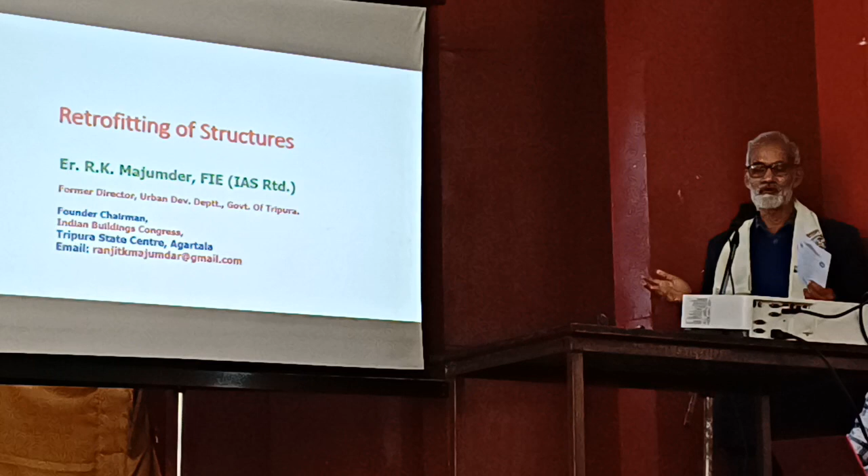In the inaugural session, you have already heard about the intention of this training program. The topic is retrofitting of structures. It is a very wide range. Actually, it needs at least a 3-day program for this discussion and training. However, since this is a beginning as a joint program between Tripura and Manipur, associating Indian Buildings Congress, a professional body, and also the largest professional body, Institution of Engineers India, Manipur State Center, I believe that in future we will be able to conduct such type of program not only in this state but in other states of the Northeast also.

So next, my contents of presentation: concept of repair, restoration and retrofitting of structures, retrofitting of buildings, retrofitting of bridges, some knowledge sharing on specific retrofitting of a heritage building we have already done in our state of Tripura, and also the concluding remarks. This is a very large presentation. I will try to skip.

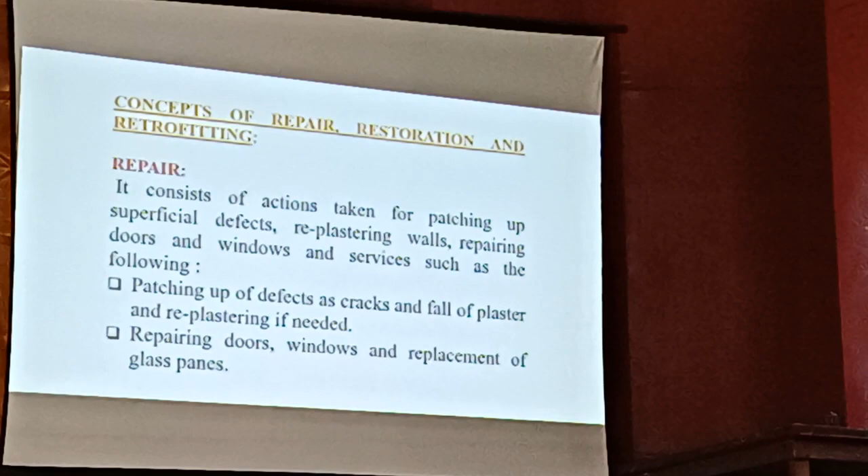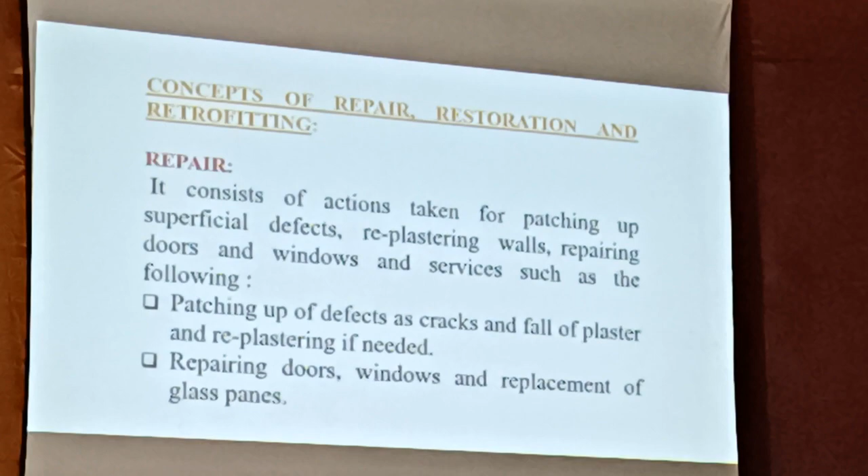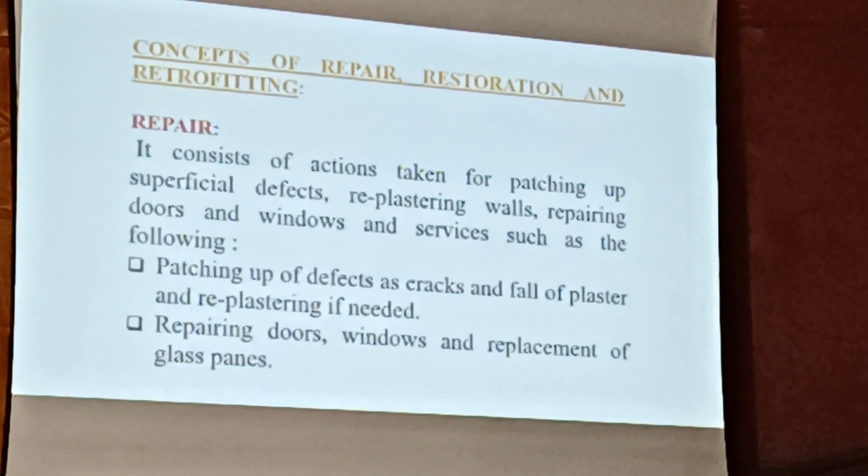Repairs you know. Sometimes we become ill, we go to the doctor, and as per the necessity, influenza or whatever, we do the thing. In our case also for the structure, as and when required, some repairing, some plastering, some electrical side or mechanical side we do in this repair. So we are not interested in this one. Next. So it will be seen that repairing work carried out as above does not strengthen the structure. It is only the first thing.

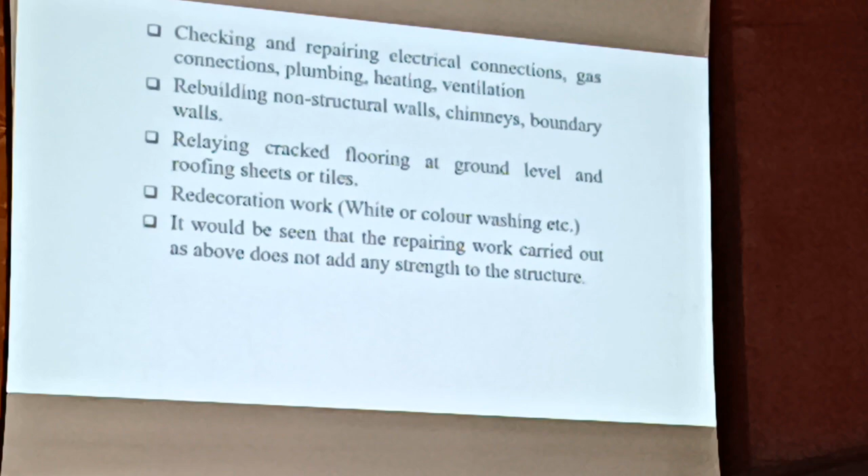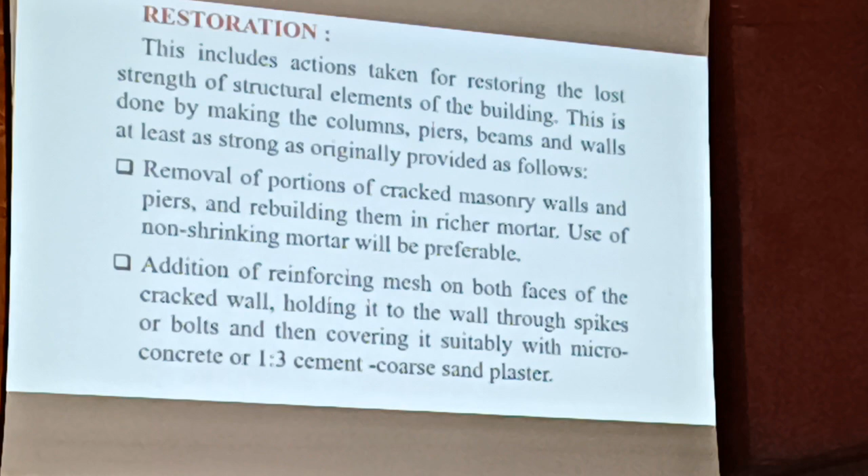Then comes the next, restoration. Restoration is something different from the repairs. When we do it, if this type of repair is required, we restore the strength of the different members of the structure to its earlier position. So it is another kind of repairing, and sometimes the strength may be increased also.

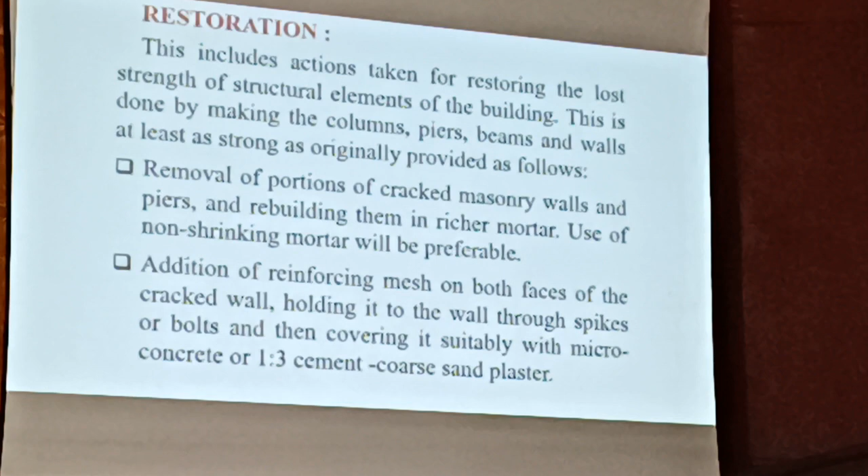Next. Now, today's topic, retrofitting. It is something different from the restoration or the repair. What we do in the retrofitting and what we mean by retrofitting? By retrofitting, actually we mean to strengthen the structure, particularly so that it can resist the earthquake forces, sometimes the earth pressure due to sliding, and there may be other issues also. So retrofitting is a very important issue.

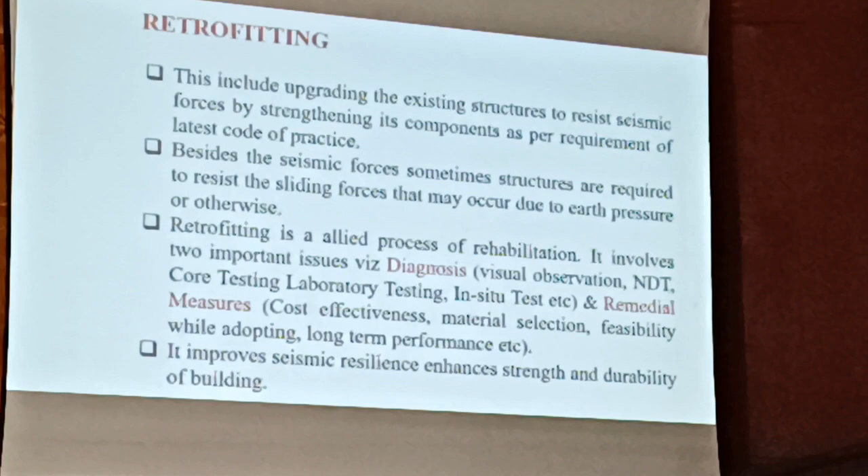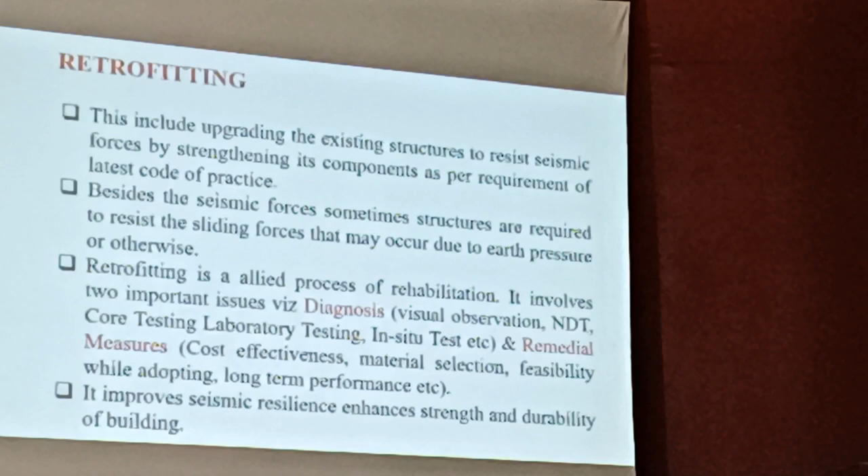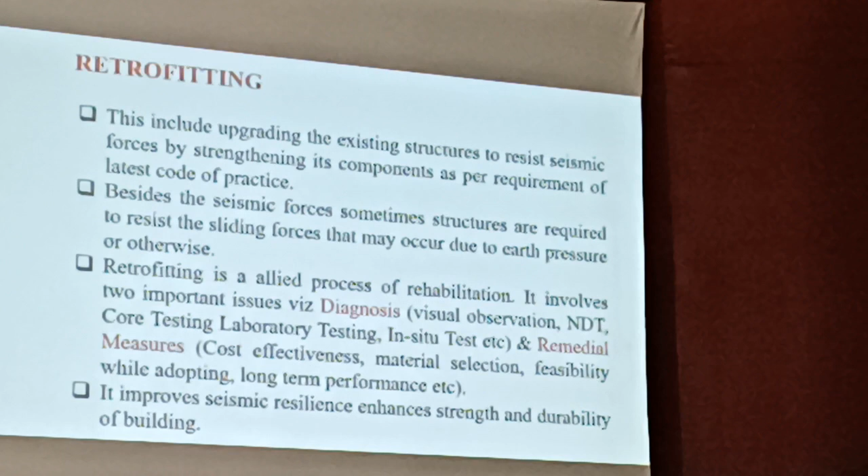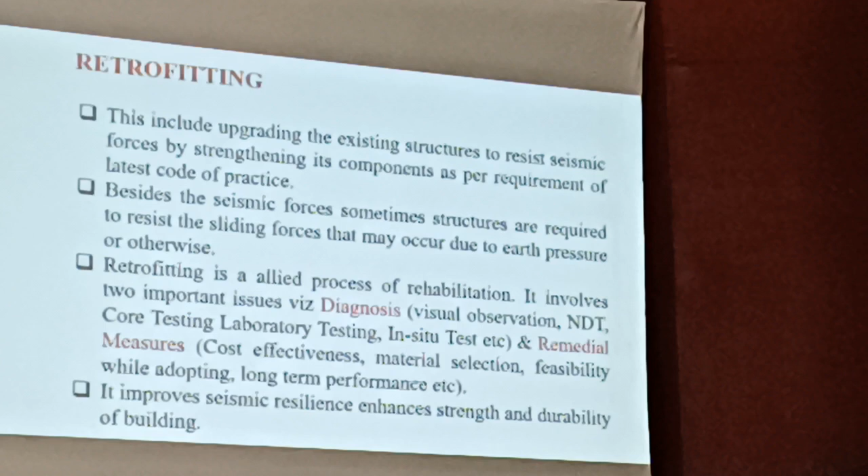We constructed many structures long back, depending upon the availability of the codes at that time. But now the code has been revised and the structures have aged enough. So it has become essential to retrofit those structures. We cannot leave out those things. So in that way, the topic is very important. In retrofitting, we do the diagnosis. What is the diagnosis part? It consists of visual observation, NDT, core testing, laboratory testing, and all these things. And remedial measures, how we can take our activities considering the economical side, and selection of the materials is also an important part. Considering these two, we strengthen the structure to behave properly during the earthquake. This is the main intention.

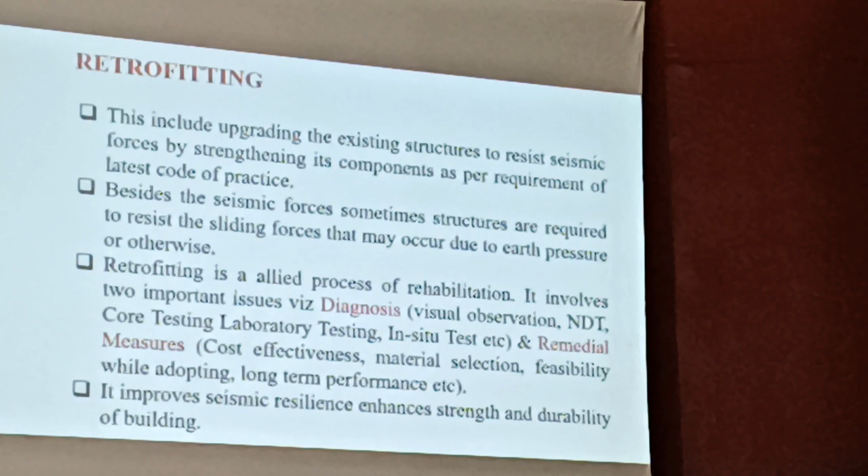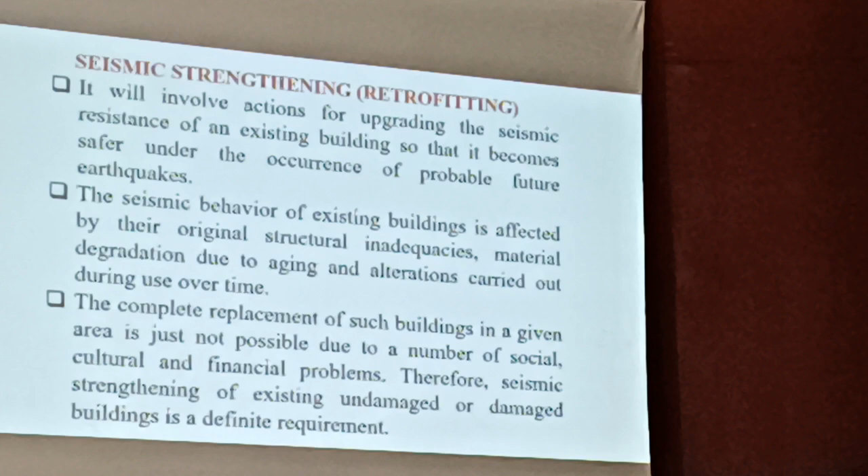Next. So I will discuss retrofitting very shortly. I will try to give a glimpse of the retrofitting of buildings as well as bridges. So, retrofitting of buildings. It will involve actions for upgrading the seismic resistance, as I have already discussed. The seismic performance of the existing building is affected by original structural inadequacies and aging. Maybe some of the structures we constructed 50 or 60 years ago. Due to aging or poor maintenance, they require retrofitting to behave properly at the time of an earthquake. This is very important. And the complete replacement of such buildings is not possible. As the principal mentioned, it is not possible to replace all the things because financial constraints are there. So we have to do retrofitting.

Next. So for seismic retrofitting and structural restoration, sometimes we see that 40 to 50% of the cost of new construction is required, but generally it does not exceed 25 to 30%. So it is always welcome if we can do it after the service life of the structure, maybe 70 years or like that.

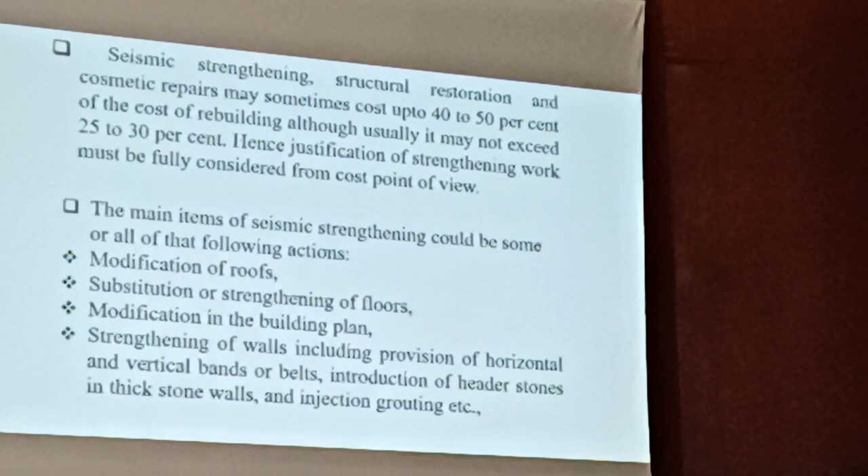If we spend 20%, 25% of the reconstruction money for this activity, it will give us service for another 100 years or 70 years. So it is always good. That's why retrofitting is important, and these are the parts involved in the retrofitting process: modification of the roofs, upgrade and strengthening of the floor, modification of the building plan, and sometimes strengthening of the walls by giving seismic bands, horizontal or vertical seismic bands. All these things we do in the retrofitting process.

Despite our repeated persuasion with the government as well as the society, we have failed. Honestly, I am confessing all these things. Our engineer team has already mentioned that the government has given various responsibilities to the Institution of Engineers or Indian Buildings Congress in this regard. And sometimes the Agartala Municipal Corporation has given the responsibility of peer review of buildings to the Institution of Engineers. But we have failed.

This type of structure is built without proper designing. The Institution of Engineers Manipur Center Chairman was mentioning that some four-story building during the 2015 earthquake consulted an architect, but the construction was not under the purview of a structural engineer. That is the main issue all over the Northeast, and in many other states also. I have visited Nepal. A team of engineers from the Institution of Engineers visited Nepal after the 2015 earthquake. We saw how the buildings have been put up there and gave a report to our government. They are very much advanced compared to us.

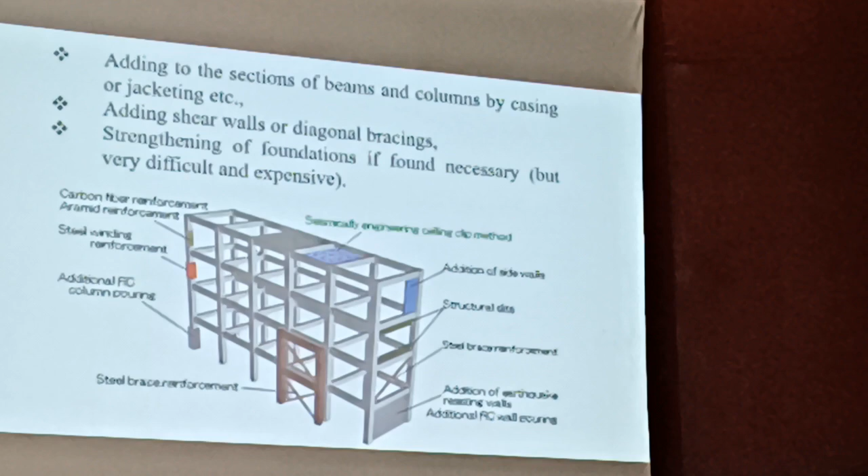After the UNDP training, for building plans approved by the municipal corporation, they have to mention the name of the mason. They have conducted many mason trainings there, and the mason's name must be in the approved plan itself. They have given a guideline with the bearing capacity area-wise, mostly for up to 3-story buildings. They prescribe that column spacing should not be more than 4 meters or 6 meters,

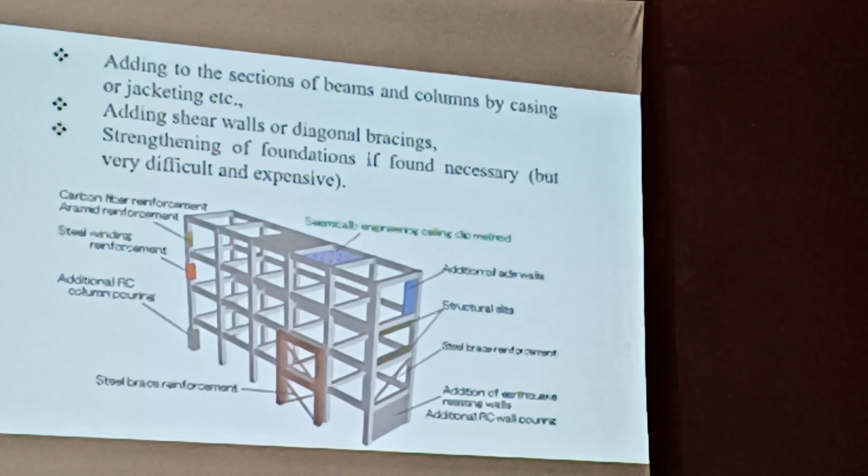and what the dimension and nature of the footing should be, prescribed by the Urban Development Department of Nepal. We came back and gave these issues to our government. Such things are necessary. So with this simple diagram, I have tried to explain all the things necessary for retrofitting a building. Next.

This is a statistic developed by a professor, published in 2000. In the Northeast up till 2000, there are 200 earthquakes of magnitude 5.5 to 5.9, and 128 of magnitude 6 to 6.9. There are mega earthquakes also: 15 of range 7 to 7.9, and 4 of more than 8. And the return period is only 4 months. On these statistics, there may be earthquakes within a 4-month interval.

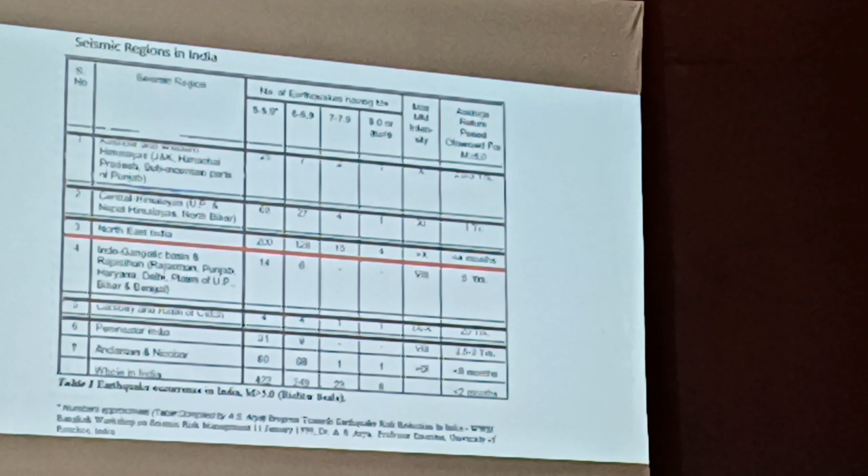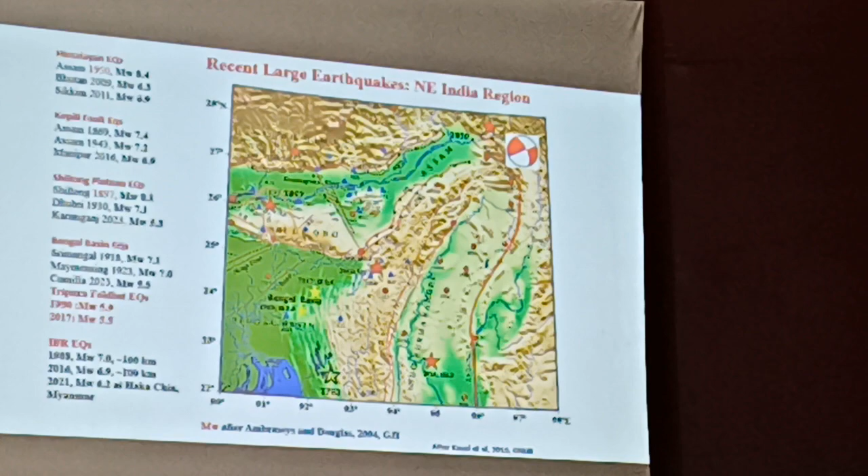And you see, except the Andaman, where the return period is 8 months, other states are more than 1 year. So we are in a very dangerous situation. And this is for the whole northeast. This earthquake map represents the total scenario of the northeast states. You see where and how many kinds of earthquake we may suffer.

First one is the Himalayan earthquake, which caused the 1950 Assam earthquake, and then the Bhutan earthquake in the year 2009, and again Sikkim 2011. Then the Kopili Fault earthquake. You see Assam again faced one in the year 1869 with a Richter scale of 7.4. Assam again 1943, 7.2. Manipur, due to this Kopili Fault belt, 2016, 3rd of January.

So we are in a very serious position. And for the Shillong plateau also we have suffered 1897, and that was a mega earthquake of Richter scale 8.1. And Dhubri earthquake again 1930. Karimganj very recently in the month of November 2023 with a scale of 5.3. That shocked Tripura, and the Bengal region also.

And then the Bengal Basin earthquake. Srimangal, a part of the Sylhet district, 1918, Mymensingh 1923, Comilla very recently in the month of December. That was 5.5 Richter. And in Tripura, 1950, again just after the Manipur earthquake, we have observed this kind of earthquake, right? And Manipur is very near to Burma. Indo-Burma region, 1988, a magnitude of 7, 2016 again with a Richter scale of 6.9, 2021, that was 6.

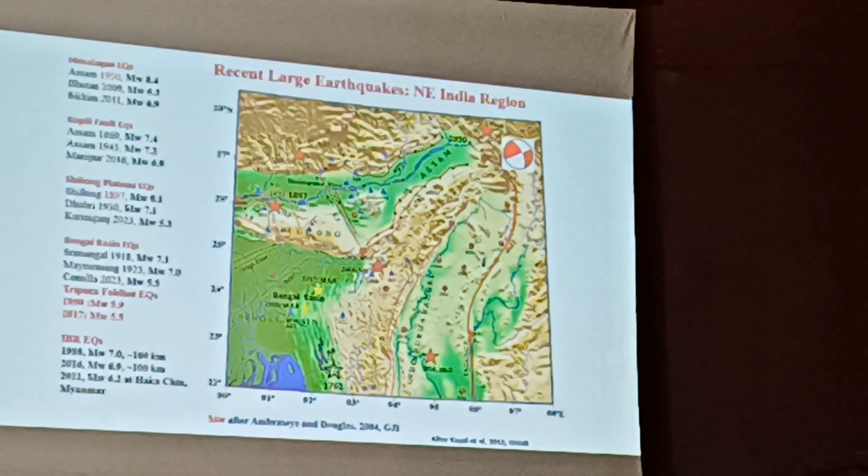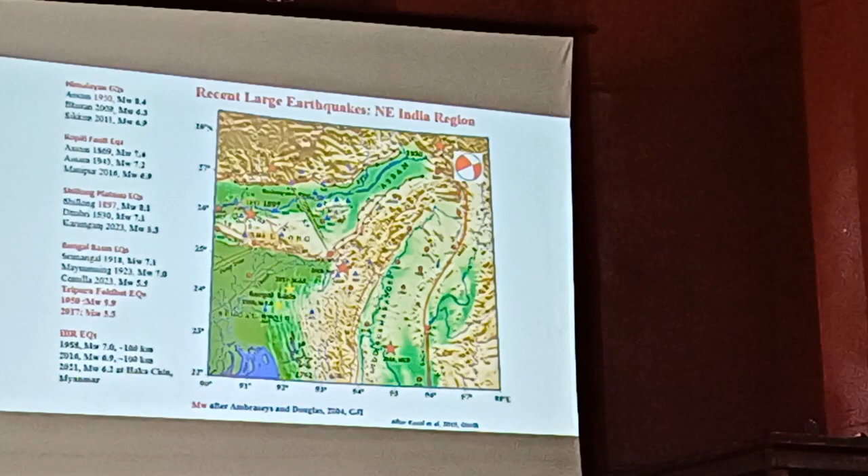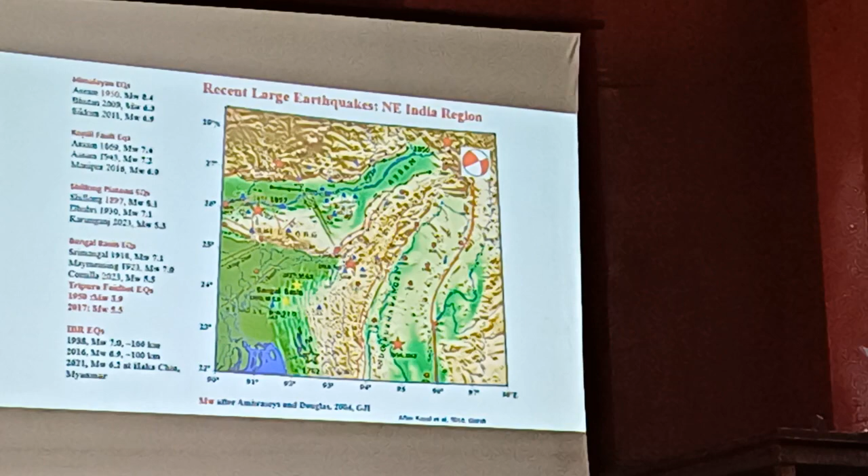So these are the 6 categories of earthquake we may face in the future. So we are in a very serious position. That's why, when we construct in future, we should take all the precautionary measures, as well as we have our responsibility to retrofit and send the message to the government as well as to our society that we should, as far as possible, retrofit our structures so that at least our life can be saved at the time of the earthquake.

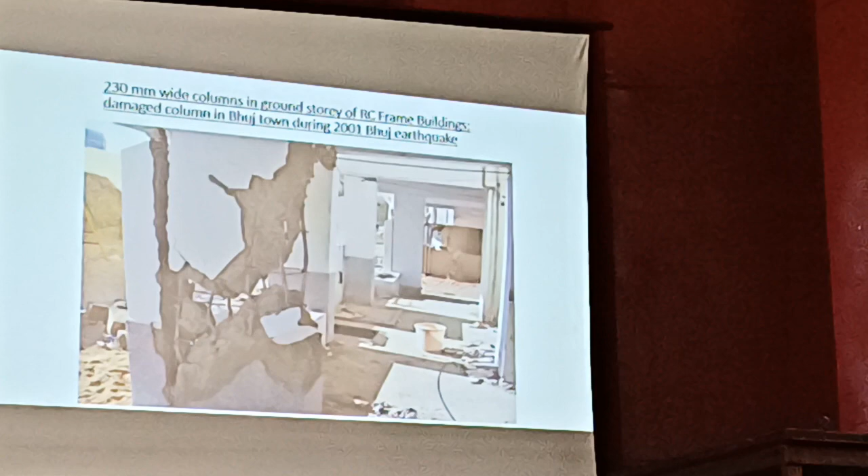Next, this is another Bhuj earthquake, total collapse. And why did this collapse? Due to the joint failure. So this joint is very important. As in our body, in the leg and the hand, the joint is very important. If it breaks down, then it is very difficult. Either you have to retrofit with a rod or all these things. If you can retrofit it, it will serve for many years. But this type of failure should not come. So this is very important.

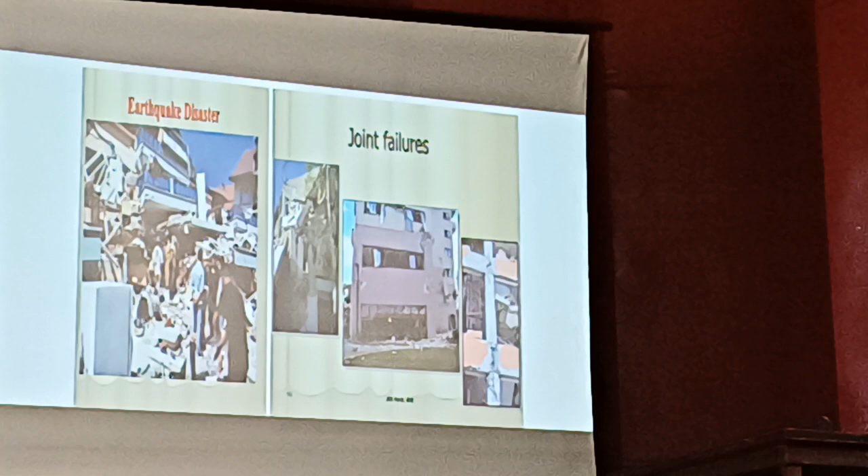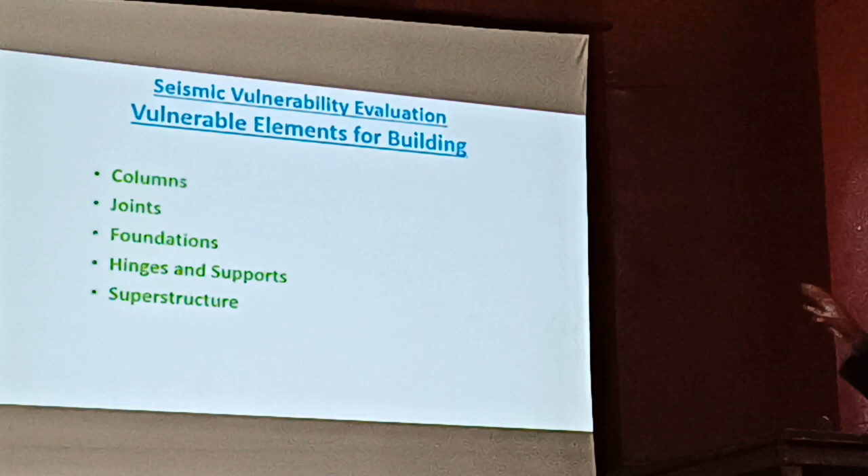Next. Now, what are the important parts we have to take care of? The beam-column joint, foundation, the hinges of the structure, and the superstructure we have to take care of. These are the main important points. Next, very quickly. You see here the joint has failed. So next, these are the causes of the failure: insufficient construction, inadequate construction.

We are running behind. Now you see steel companies are producing steel up to Fe 600. 500 is the minimum, 550 also. But in addition, they have now introduced 500D and 550D also. So we are confused what type of steel we have to use. What is D? D means ductility. It is always good. But in the market, why do we go there?

The owner, the general owner, not the engineer, they will go for this FE 600. I always propose that you should not go with the FE 600. You please do with FE 500D only. That is good, FE 500D is very good steel. You go for that, and we can go up to 4-story, 5-story building, there is no issue. For a 2-story building, any kind of steel you can use, mostly it will pass this chemical test and all these things. That is good.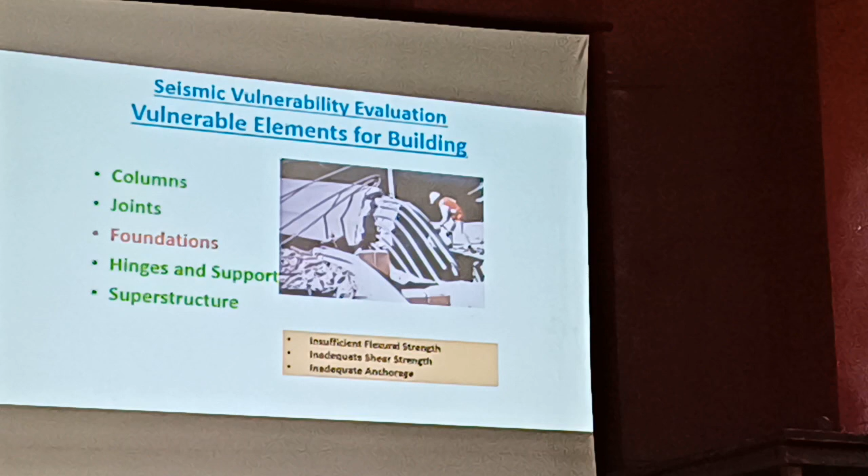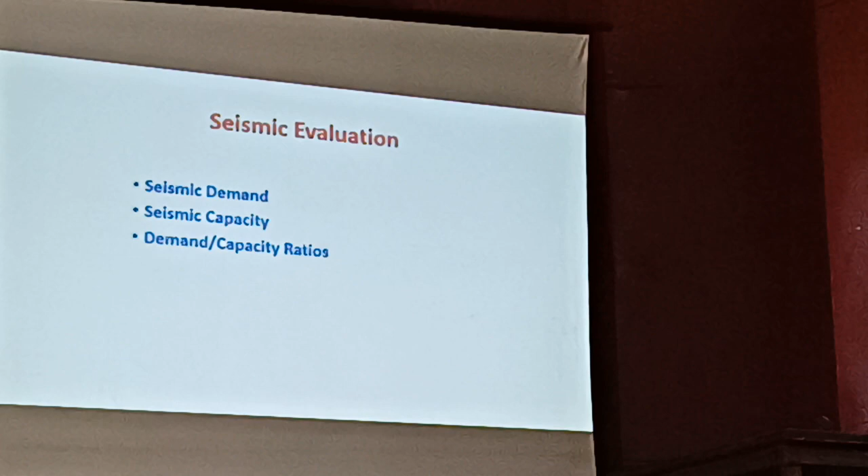So this is very important, this joint failure, how this happens I have shown here, and how we should retrofit it. This key part is important. I think the special speaker from MIT will be discussing this issue because they are from the academic background, we are from the practical side. This is the demand versus capacity issue we have to find out for retrofitting, and this is a very tedious job. And how can we do it?

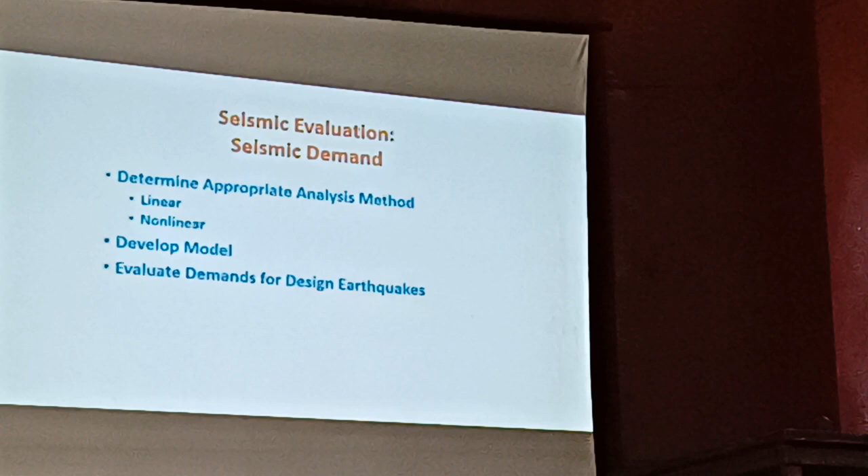Global and local, these two words are common. Global means for the whole building, once we go for retrofitting, then we call it global. And once we do this for joints or a simple member, then we call it local retrofitting. For global retrofitting, adding shear wall, adding infill wall, adding bracing, adding wing wall, and all these things we do. Or base isolation, which is a very costly affair.

Whereas in the northeast, this base isolation has not yet been started. Only by Professor Dev of IIT Guwahati, for a simple building, a model has been developed, and the Arunachal brothers have constructed that building. This base isolation has been created.

And I am happy to inform you that in Tripura, the government has now constructed a 40-story building, and in that building we have suggested this base isolation. Work has started, we are doing it. It is of course a very costly item and technology, and takes time.

And for local retrofitting, that's jacketing of beam, jacketing of column, jacketing of beam-column, jacketing of individual footing. Perhaps after the 2016 earthquake year, some of the buildings at Silchar also were affected. They are the flat type of building.

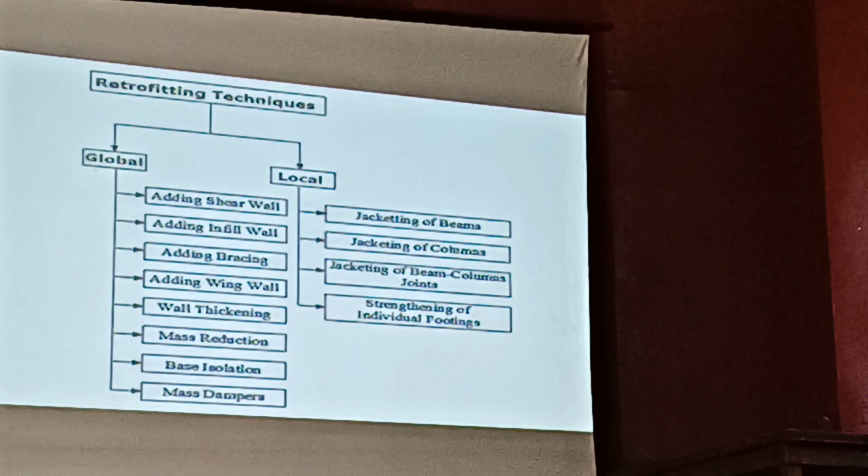I, along with Engineer Tinmurathan who was the honorary secretary at that time, I was the chairman, we made a joint program with the Institution of Engineers Silchar with Professor Dr. Oshim Pal. We made a visit there, and many buildings have been executed by that team, or the columns have been retrofitted. So these are the issues where we have to give attention, and these are some of the systems.

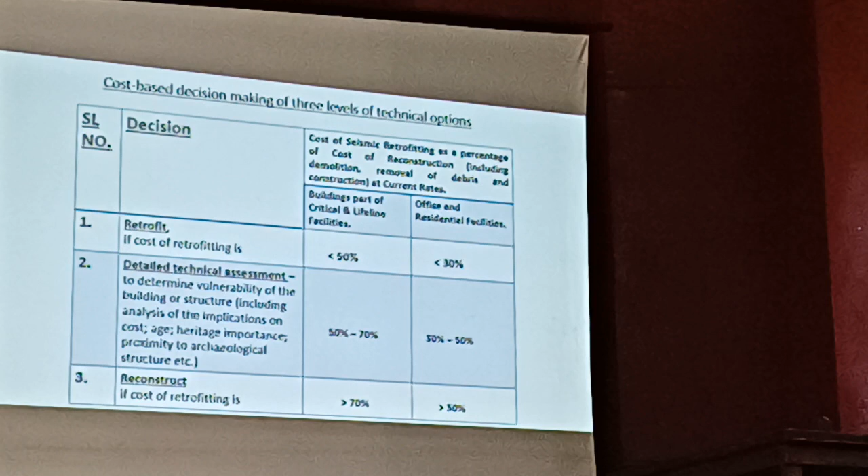Now, I have already mentioned that if the cost is less than 50%, then we go on the basis of the nature of the building. If it is a critical building, whether it's an office or a facility type, it is less than 30% or up to 50%. And if it is more than 50%, then we have to do critical analysis, only for the heritage building, then I will prescribe, or for hospital-type buildings, we prescribe it for this activity. This is the prescription given by the National Disaster Management Authority, NDMA, recent prescription. So if the cost is more than 70%, then we propose for reconstruction.

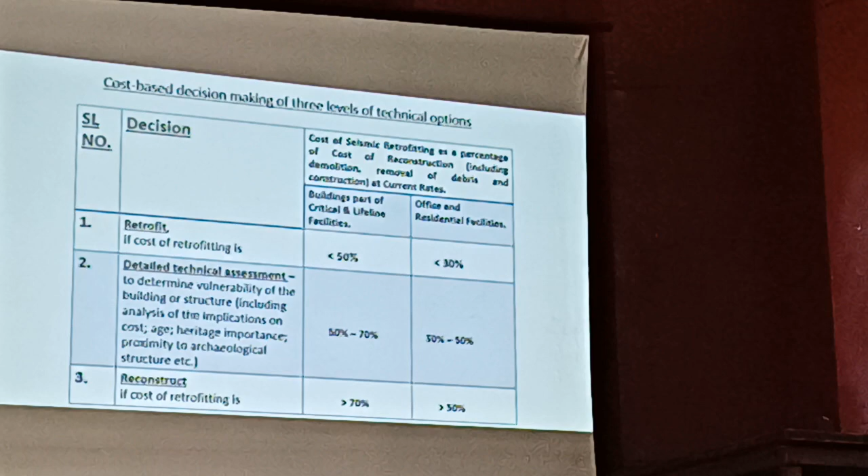Now, how this vulnerability leads to reconstruction of the building? Very quickly I will try to finish it. Next, this is a building, our SDRF building.

That is the State Disaster Response Force building, and many disaster management programs have been conducted there. Every state has their SDRF building. In Manipur also, I believe there is an SDRF building, because disaster response forces are there. And this building was constructed only in the year 2001.

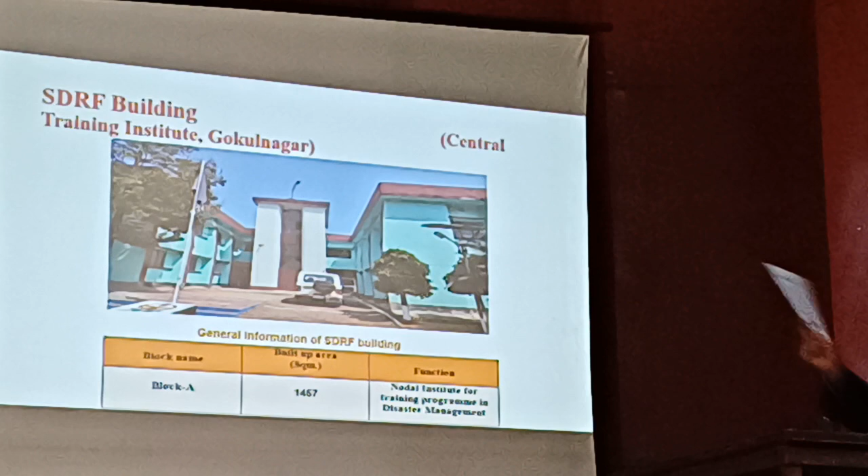None of the building was safe. This is a very serious position. We constructed this building only in the year 2001, and while we analyzed it, we found it is not safe. That is very serious.

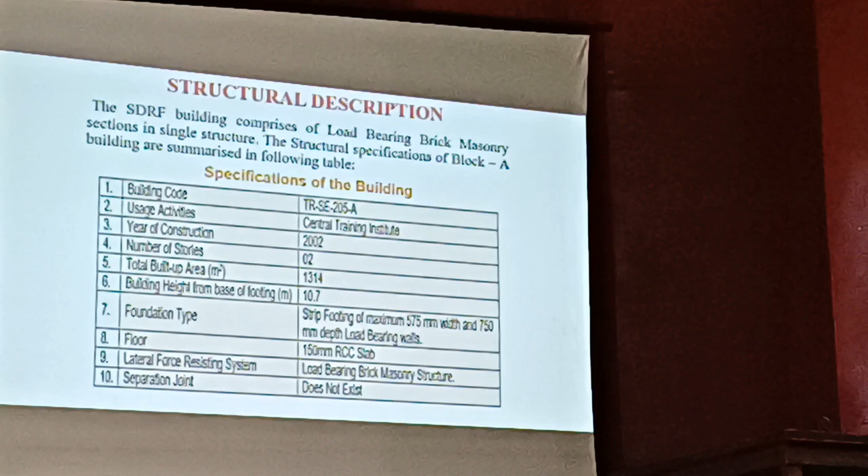This is the cycle. Now we have made the condition assessment.

What we have observed: there are dampness and cracks both in the wall and also the column and the beams. Reinforcement are visible and strengthening measures have not been done. Though the building is fine and serving as an office, these are the preliminary observations we have made here.

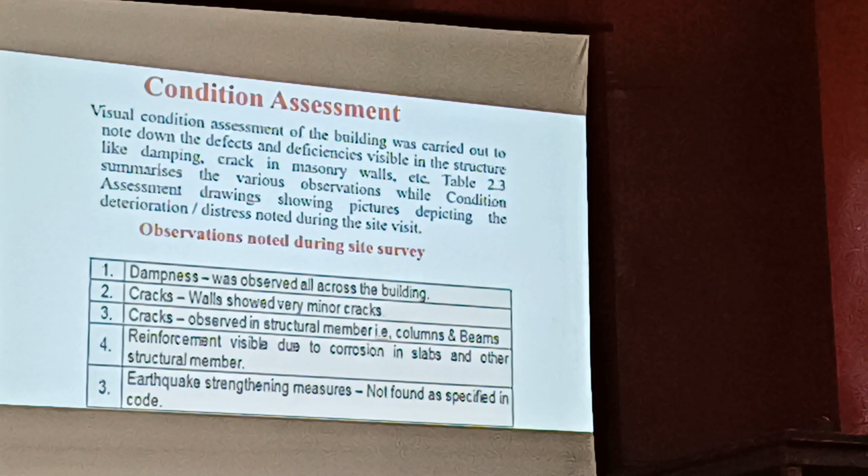This is the condition assessment showing different kinds of dampness and all these things.

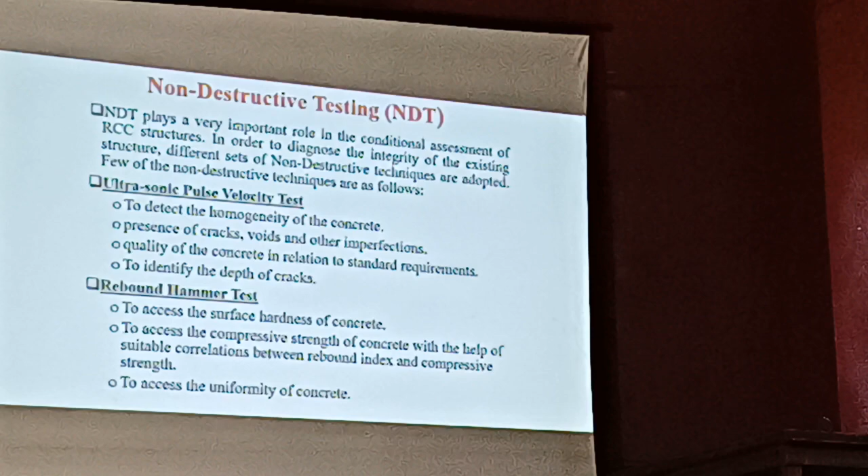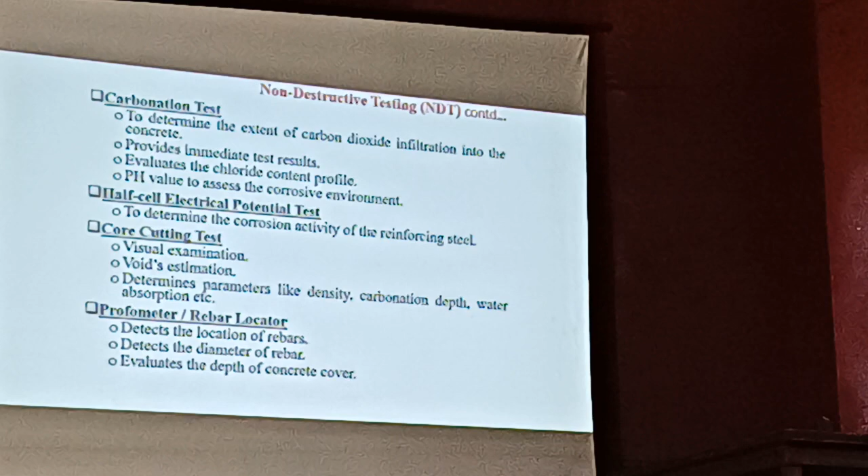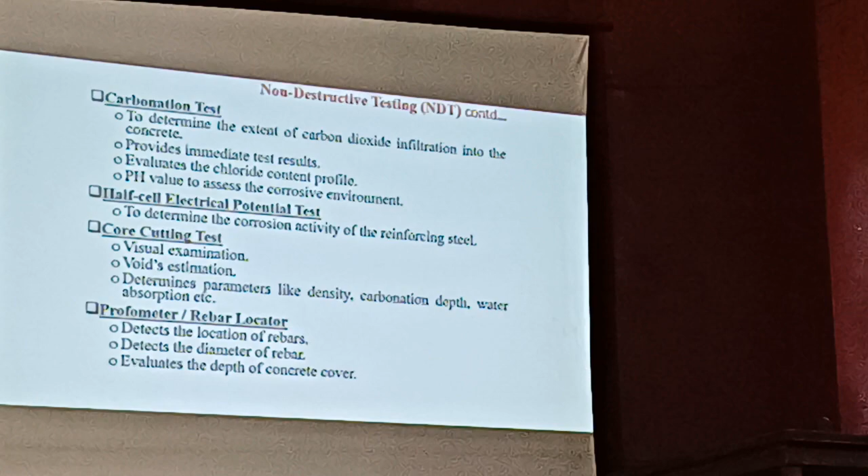Now we go for this NDT. As I have already mentioned, we do the ultrasonic pulse velocity test, rebound test, and carbonation test for finding out the corrosion index, electrical potential test to determine the corrosion, core test to find out the density of the concrete, and profometer/rebar test to detect the location of rebars and also to find out the cover of the reinforcement. So all these tests we have done.

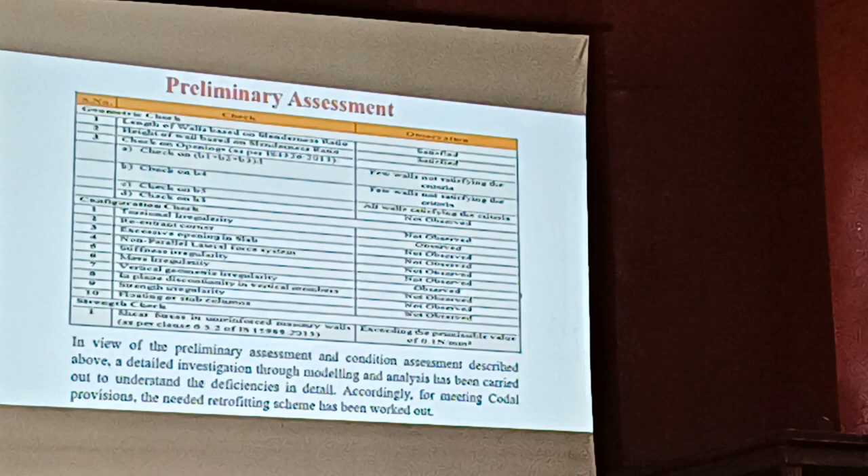From the preliminary assessment, we went to the drawings, did the geometric test and configuration test, and we have seen that a few walls have not been provided as per the architectural requirement. The geometry is not as required, so this is an issue. The fault starts from the basic planning activities.

Many buildings we have constructed long back, but while we consulted the new version of the National Building Code, we see that they do not comply.

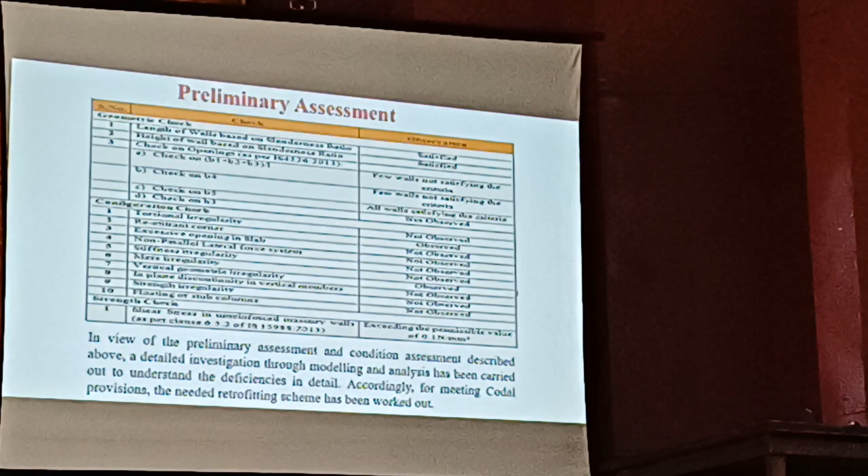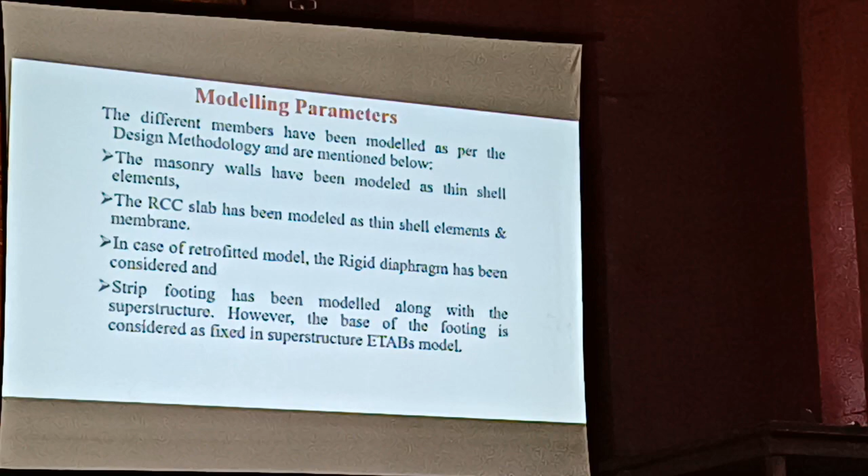For that purpose, taking all these things, we have done the analysis by modeling. This modeling analysis has been done. These are the seismic loads we have considered on the basis of IS 1893:2016, taking all these parameters into account.

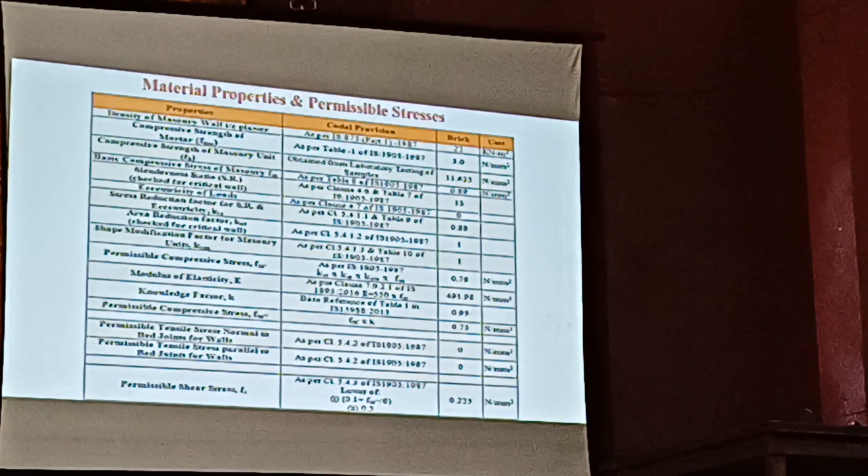And we have seen that from the software analysis, none of the walls, whether in vertical stresses or axial stresses, or for out-of-plane action, both in the transverse and longitudinal direction, were safe. All have failed.

Now, we have recommended this because during the 2017 earthquake we observed in Tripura, though this building was not affected, we recommended to the government that this structure needs retrofitting, and that has been done actually.

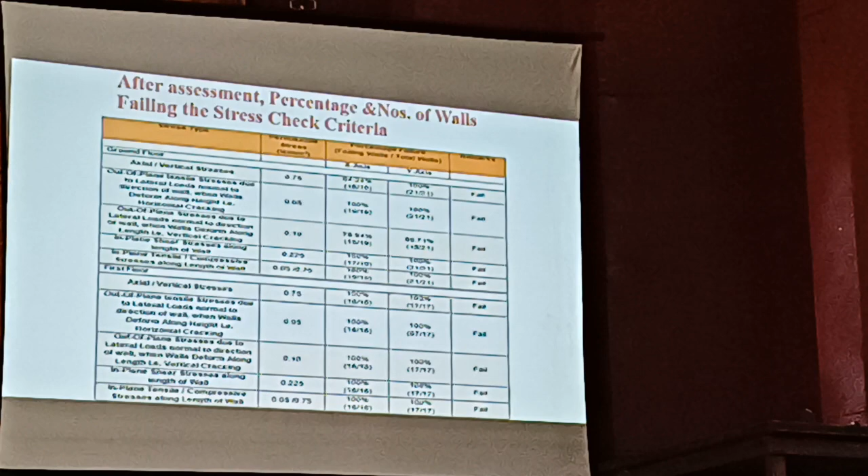Now how have we done it? You see next: preliminary retrofitting design was made with mesh reinforcement for the wall, for vertical containment of the wall. We have proposed it and we have done it.

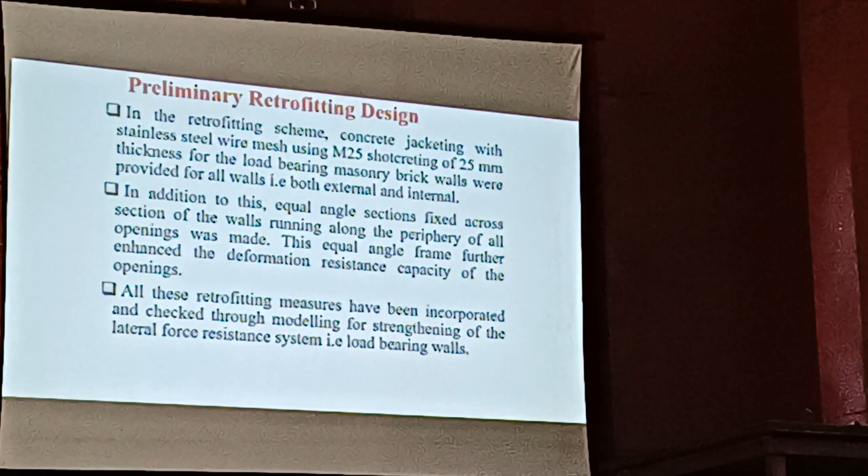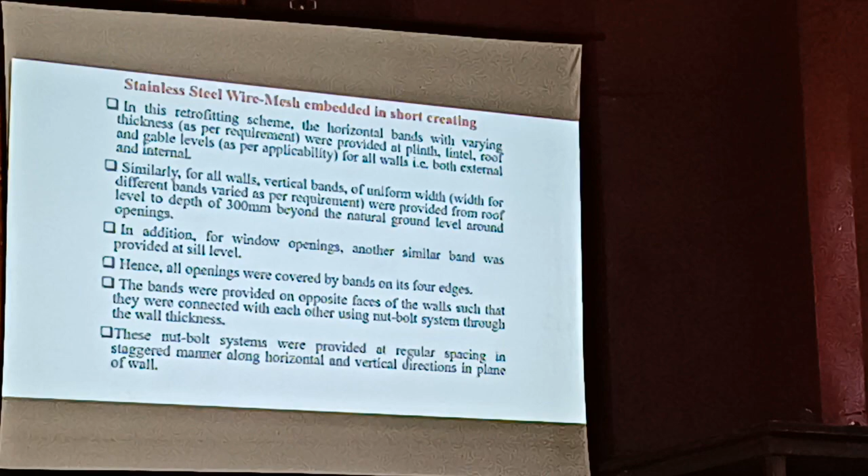And for all the doors and windows, the opening parts, by special bands placed at the lintel level, at window sill level, and also at the jambs of the doors and windows, we have made it. This is the technique that has been followed there.

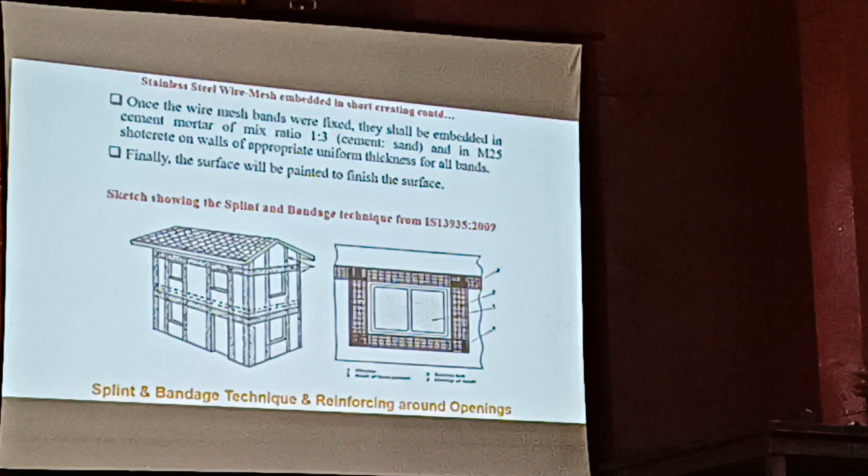After this, taking all these things, we again analyzed it with the software, and we found all are now safe. So the cost was not much - only 14,000 per square meter we have spent there. But the building has been saved, and I believe it will serve another 50 to 70 years.

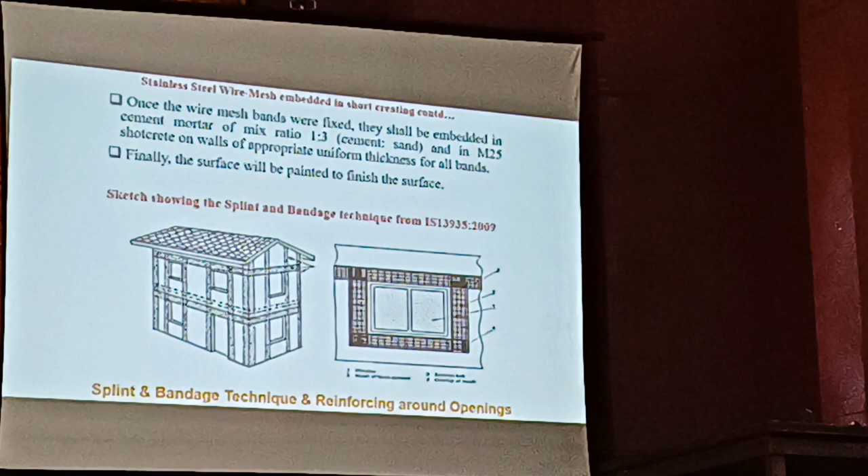So this way we may help the government - this is a very important issue we are raising. This is the jacketing part, how the jacketing part works.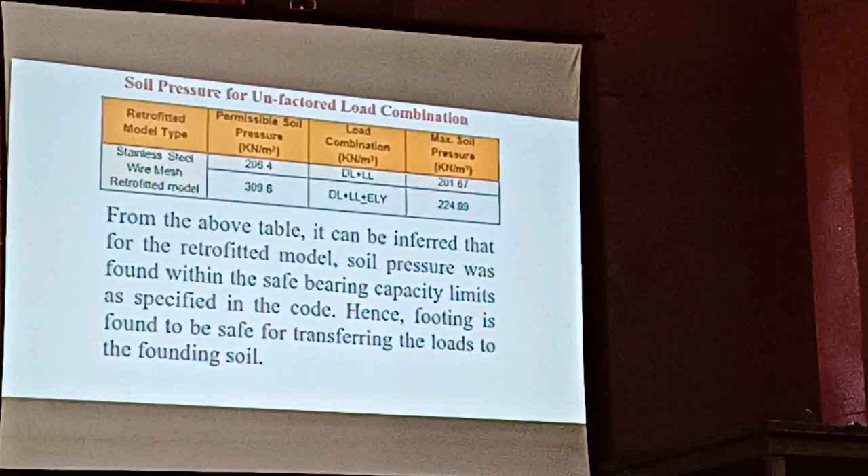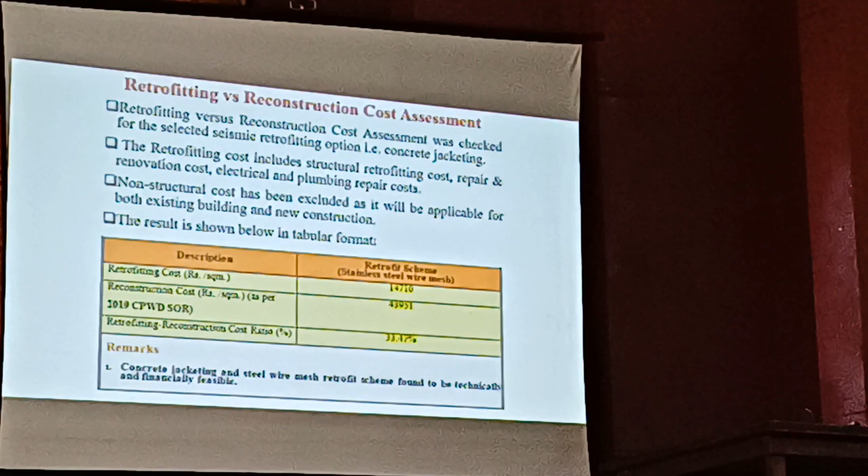The present construction cost is more than 40,000. So this retrofitting was very economical and we have paid for it.

Now, retrofitting of bridges. Up till now, whatever building work I mentioned, we decided it is very important and we will do it. But I believe that retrofitting of these bridges is more important than the buildings in the northeast region. We are in a very, very severe position. I am telling you, we are in a very, very severe position for the bridges.

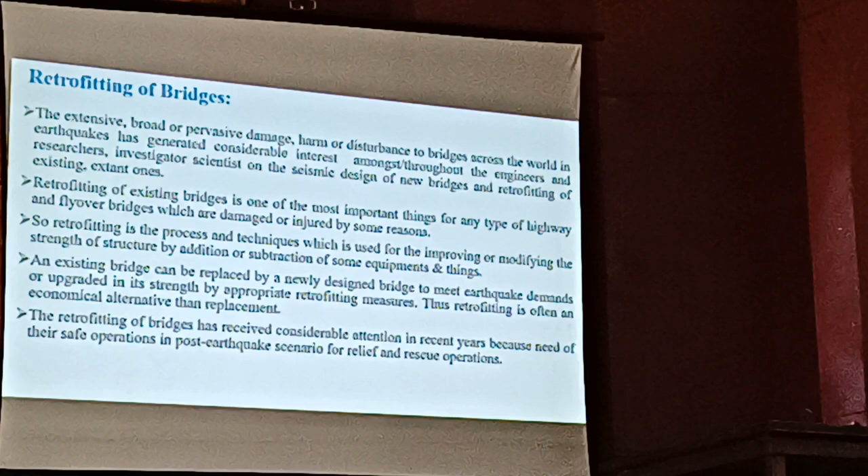And how are we in a severe position? I am telling you. Why should we do it? Because the main tactical communication is maintained by the bridges only. And most of the bridges, those constructed before 2000 AD, are not safe at the time of disaster, whatever we have seen and observed by analyzing. As I have already mentioned, so why it is important - you see next.